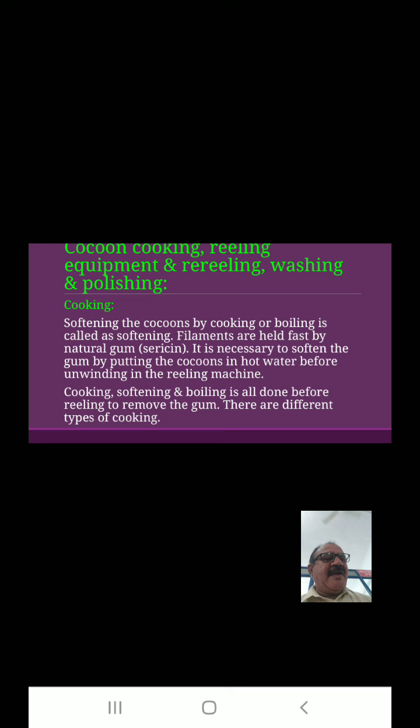There are different types of cooking. First method, floating system for top reeling, and sunken reeling is adapted for the reeling. In this floating system, cocoons are cooked only to the extent. The shell becomes wet and they float in the water where the cocoons are put into the reeling basin.

Cocoons are treated in open pan and they are hand brushed in the same basins, and after getting true ends, cocoons will be transferred to reeling basins where the temperature is lower.

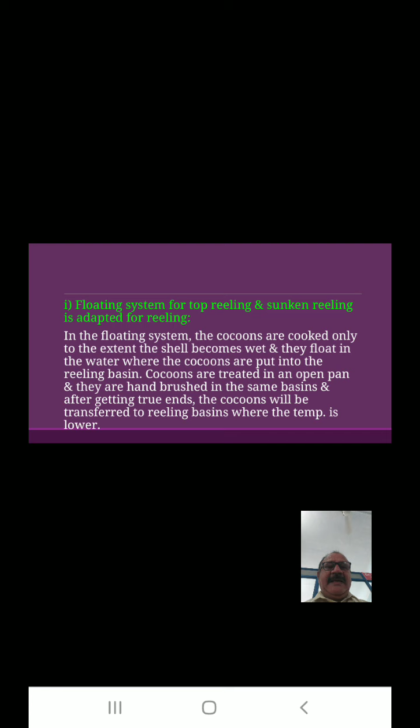Second, open pan system. Boiling is done in open earthenware or copper vessel in which water is boiled directly over the fire. Cocoons are put into the boiling water and kept immersed in it by a wooden ladle until they are cooked and become dull, translucent, and soapy to touch. Here the filaments come off easily only from the cooked cocoons. This system is adapted in charka reeling where a limited number of cocoons are there.

Advantage of this system: this is a cheap method and requires less labor. Disadvantage of this system: layers of the cocoons are not cooked evenly. Overcooking or undercooking results, only a small amount is cooked and it involves more time. The water becomes dirty quickly in this process and has to be replaced periodically with fresh water.

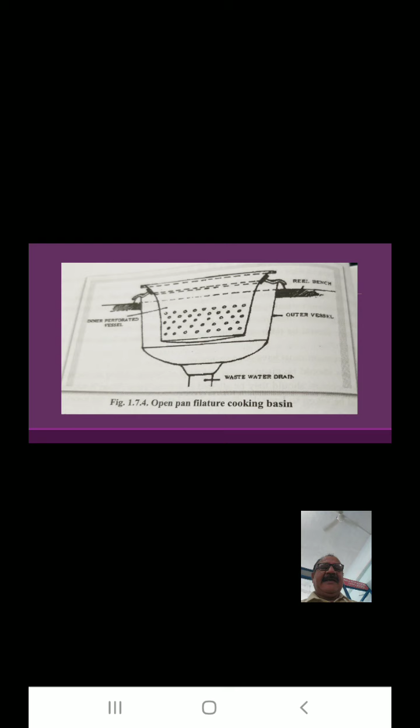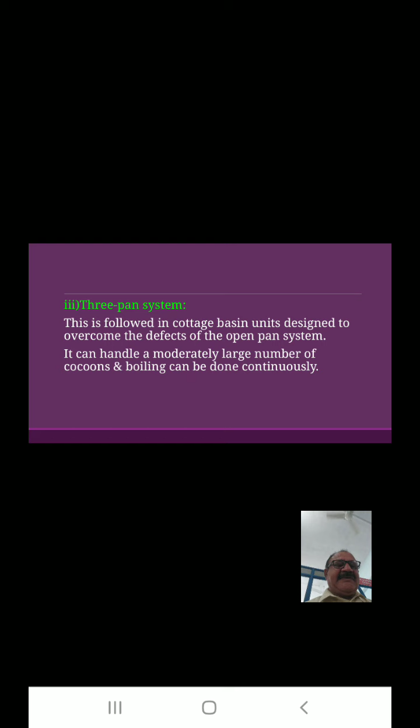Then the third type of system is the 3-pan system. This is followed in cottage basin units, designed to overcome the defects of the open pan system. It can handle a moderately large number of cocoons and boiling can be done continuously. The main parts of the cooking unit are a platform, 3 basins or vessels of copper, long handled brass wire gauze for handling the cocoons, long handled perforated ladles, an open shelf for holding the accessories, cocoon receiving tray, steam and water connection to the cooking basins.

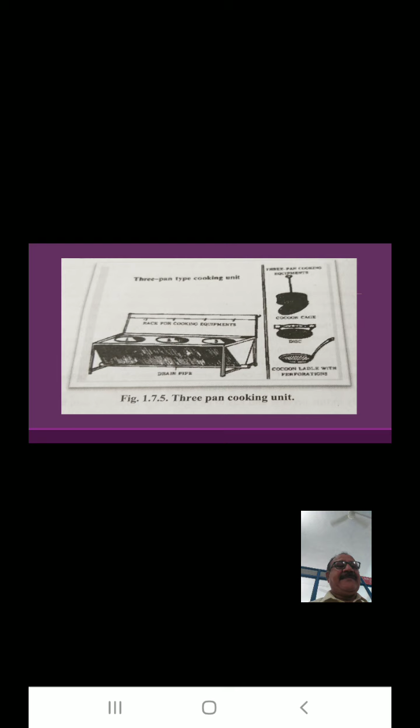The water in the first and third basins is maintained at a high temperature, about 90 to 95 degrees Celsius, while the middle at 65 degrees Celsius. The wire mesh cage is filled with 60 to 70 g of cocoons and immersed into the first chamber for 60 seconds. Due to the action of the hot water, the outer cocoon layers are softened and air in the cavity gets heated, expands and is expelled from the cocoon.

Next, the wire mesh cage is transferred to the next chamber and held for 30 to 40 seconds. The temperature of the water in this chamber being lower, air in the cocoon cavity is condensed, and to replace its place, water from the basin is sucked into the cocoon, thus completely soaking the sericin and loosening the cocoon layers.

Next, the cocoons are transferred to the third chamber and kept immersed in water with the help of a wooden ladle for 1 or 2 minutes until the cocoons are cooked. Then they are transferred to the cocoon transporting trolleys to be carried to the reeling basins.

And fourth, next system, sunken system of reeling. Sunken system of reeling. In this system of boiling, the air in the cocoon cavity is largely replaced by water and the heavy cocoons remain sunken in the water during the reeling operation. This is a modification of the above three pan system, in that by subjecting the cocoons alternately to hot and cold water, air in the cavity is made to expand and be expelled first and then contract and condense, facilitating the suction of water into the cavity.

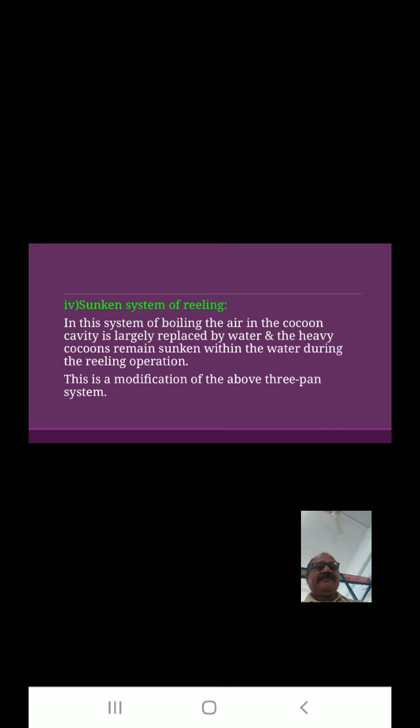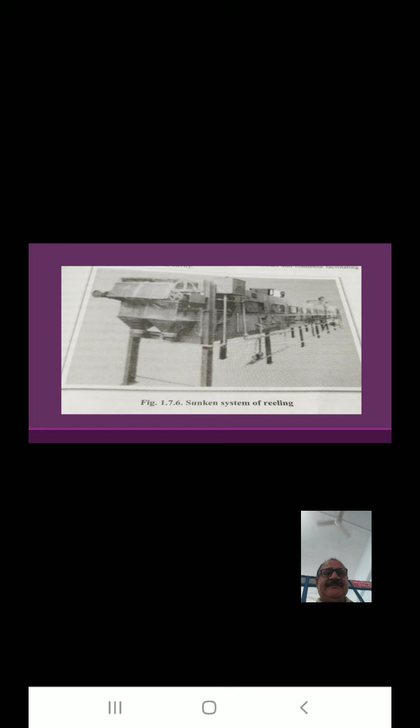Next process, that is the brushing. Brushing. The cocoons are cooked thoroughly and must be brushed for removing the floss layer. In India, in reeling units the floss layer is removed individually from each cocoon by peeling off by the reelers. In advanced countries, machines are used for this brushing purpose.

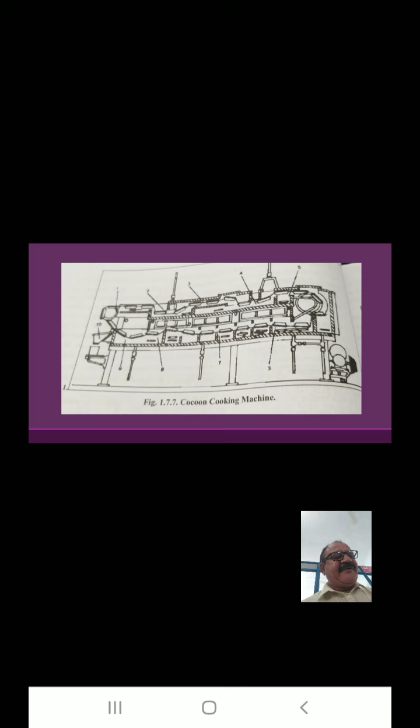Method of brushing. A single stick or a prong made of two pieces of sticks or twigs is used to remove the floss from multivoltine cocoons for reeling in the country charka. This stick is introduced within the basin containing the cocoons and gently twirled among the cocoons. Sometimes a hand brush like the short broom is used. The floss wound around the sticks is lifted and removed and kept aside for cleaning and drying.

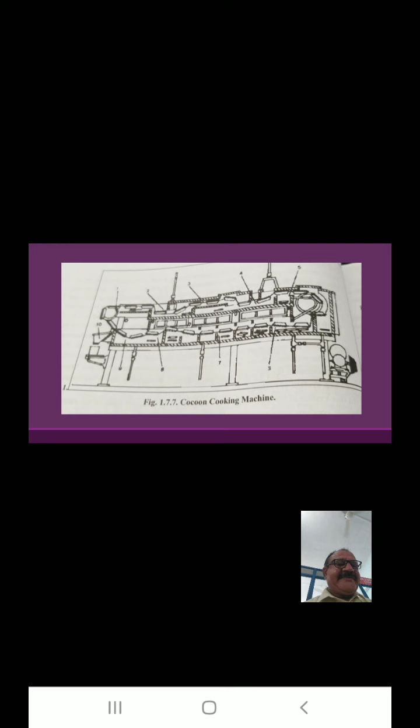In filatures, mechanical brushes are used. F-I-L-A-T-U-R-E-S. In this, when the cocoons are boiling in the cooking basins, the automatic brushes are brought in touch with the cocoons. The brushes are rotated to 140 degrees. This rotary movement is repeated 20 to 24 times. The floss comes off along with the reeling ends.

Next is the reeling. R-E-E-L-I-N-G. Reeling is unwinding of filaments from the cooked and brushed cocoons with the help of reeling machines to obtain raw silk of desired thickness. The thickness of filaments is measured in units and that unit is called the denier.

D-E-N-I-E-R. Denier is the weight of 9,000 meters of a single filament, and the internationally accepted thickness of quality raw silk is about 14 deniers. For weaving silk carpets, filaments of 21 to 22 deniers are used. For production of silk of 14 deniers, filaments from 4 to 5 bivoltine cocoons and 6 to 7 multivoltine cocoons are combined. For producing silk filament of higher denier, a greater number of cocoons are used.

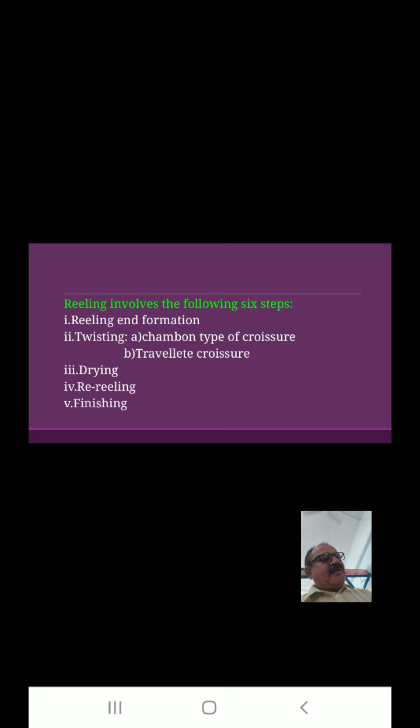Two types of croisures are used in India. First is the chambon croisure, and second is the tavelette croisure. First, chambon type of croisure. It is a simple and primitive type used in the domestic reeling unit like charka. Here, the threads from two reeling ends are intertwined to form a few spirals. The two free ends are taken through the distributor and wound on the reel in such a way that the thread from the right reeling end is wound on the left side and the left on the right side of the reel.

Advantage: it is simple and does not require any elaborate arrangement on the reeling machine. Disadvantage: there should be two ends for the threads to twist. Formation of a double thread is common. There must be two separate ends on the reel also. Second type of croisure, tavelette type of croisure. It rectifies the defect of the chambon type. It can be used in cottage basin and filature units.

It consists of 3 pulleys called croisure wheels fixed on the croisure frame in such a way that the reeled thread intertwines around itself for producing the croisure effect. The thread coming from the threader is first collected by the middle pulley, comes down to the bottom pulley, and goes upwards, intertwines around the thread coming from the threader, and the free end emerging from the spiral passes through the third pulley before going to the distributor and the reel.